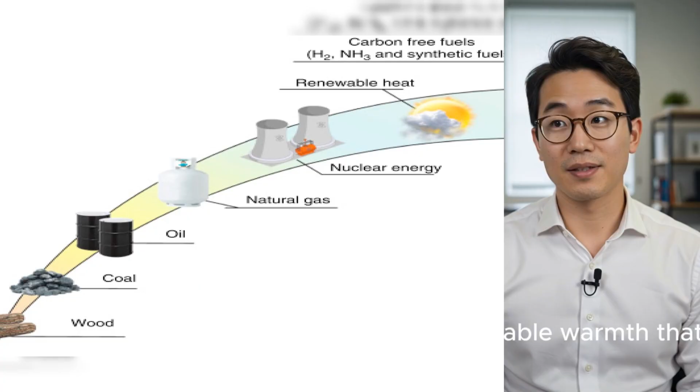The two elements responsible for this are so common that most people overlook them completely in daily life. One is sand, the same material found along riverbanks and building sites, or even right in a backyard. The other is coal, simple carbon pieces that have remained underground for millions of years, waiting for practical use.

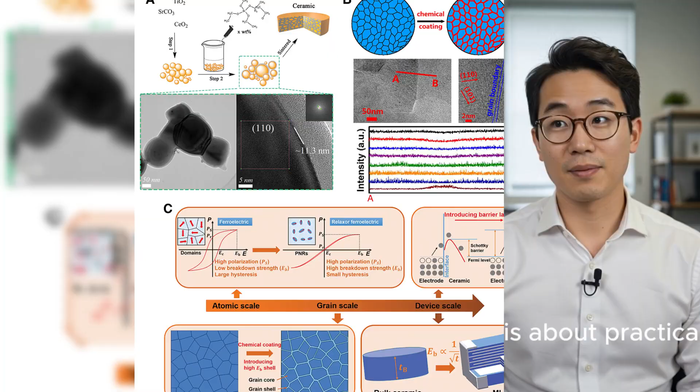When these two materials are combined correctly, they form something that large energy systems have long kept out of public understanding. This is not about extreme survival living or remote mountain setups. It is about practical application in normal homes, normal neighborhoods, and for ordinary families trying to manage rising living expenses.

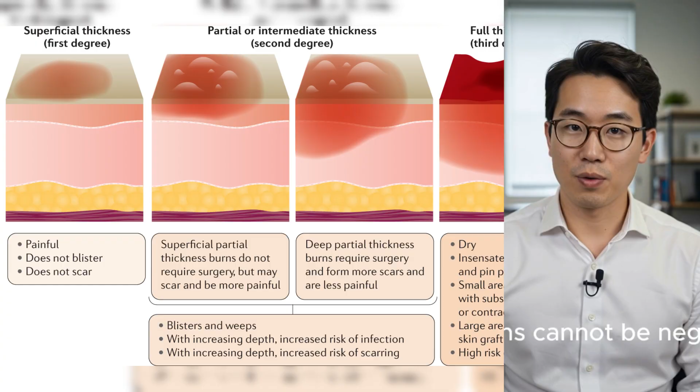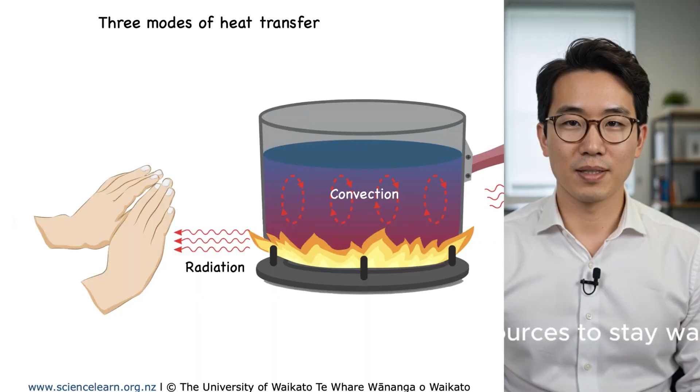Heat is one of the most fundamental human requirements. Cold conditions cannot be negotiated with. Either warmth exists, or it does not. Without it, every other difficulty in life becomes heavier. For most of history, people relied directly on local resources to stay warm. Wood, coal, dried plant material, and other naturally available fuels were used in simple systems.

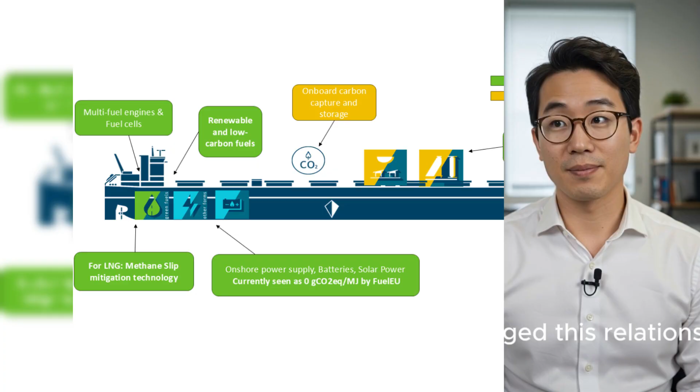Over time, industrial development changed this relationship. Pipeline networks, electrical grids, and centralized fuel systems gradually replaced personal energy independence. People became dependent on infrastructure they do not control. This means that in cold conditions, access to heat depends entirely on external providers and pricing systems outside individual choice.

That creates long-term financial pressure that many households simply accept as unavoidable. In reality, it is a structured system, and once the structure is understood, alternatives become visible. At the center of this idea is a thermal storage approach using dense material layers. Sand is one of the most effective substances for holding heat and releasing it gradually over time.

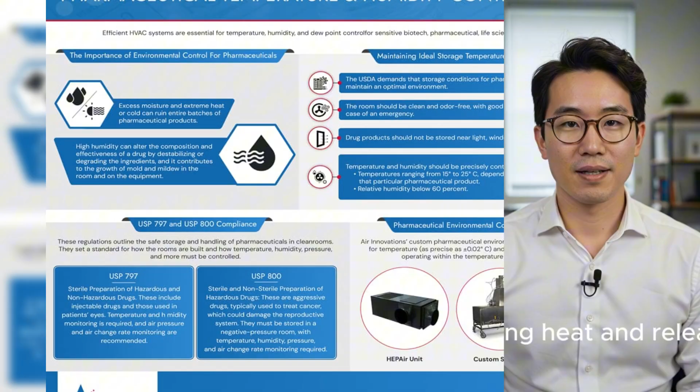This principle is not new. Earlier civilizations used thick, natural materials like stone and clay in building design to trap warmth during the day and release it later when temperatures dropped. Modern convenience replaced many of these older methods, and over time the knowledge became less common. However, the physical principle never changed.

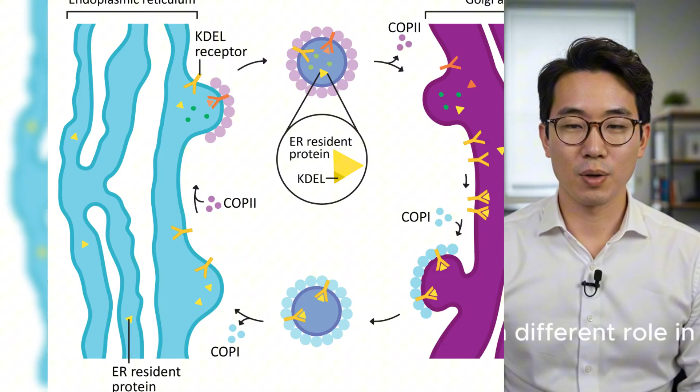Coal serves a different role in this system. When it is burned under proper conditions, it produces sustained high-level heat output relative to its size. The issue has rarely been the material itself, but rather inefficient usage.

When a controlled heat source is paired with a high-capacity heat-absorbing medium like sand, the behavior of heat changes. Instead of disappearing quickly into open air, energy is stored and released gradually. The result is a slower, more stable distribution of warmth that can align better with household needs.

The idea centers on a contained burning area surrounded by dense sand layers. As fuel is burned inside, heat spreads outward in all directions and is absorbed rather than lost immediately. Normally, open flame systems allow heat to rise and escape quickly into the surrounding space. That leads to rapid loss of energy, but within a storage-focused structure, heat is captured instead of wasted.

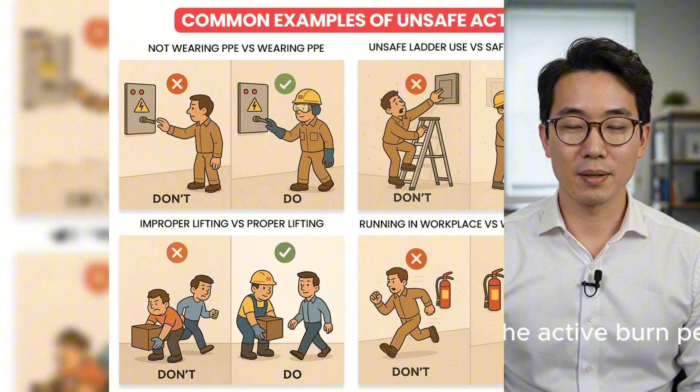The surrounding material holds it and releases it over time in a controlled way. This approach reduces dependence on continuous fuel consumption and shifts warmth into a stored form that lasts longer than the active burn period. This method changes the entire relationship between heat generation and heat loss.

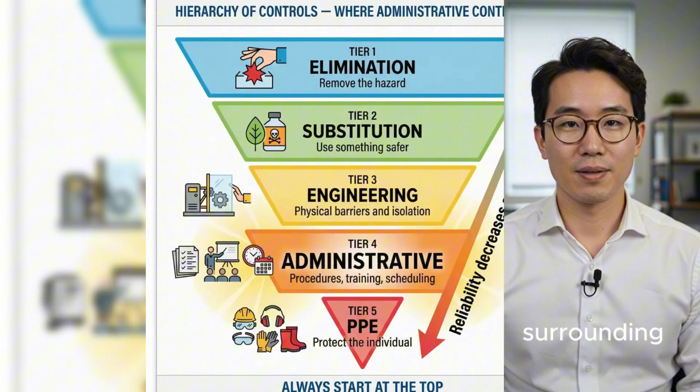When a combustion source is fully surrounded by sand, heat begins transferring into that surrounding material from the very first moment ignition occurs. The sand draws in thermal energy and retains it within its structure. What surprises many people is how long this retained heat can last. Sand is capable of holding thermal energy for extended periods even after the fire source is no longer active.

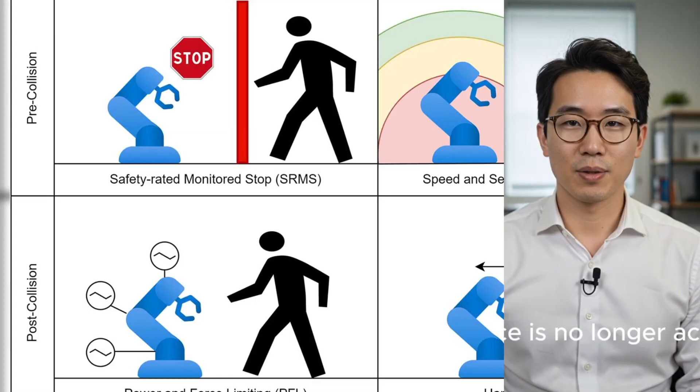This is not limited to a short cooling window. It can continue to emit usable warmth for 6 hours, 8 hours, and sometimes even 12 hours after the fuel has completely finished burning, depending on how thick and dense the thermal layer is.

That single property reshapes the cost equation entirely. Instead of maintaining continuous fuel consumption through the entire night, the system allows a single efficient burn to carry the heating load while the household is asleep. Coal plays a specific role within this structure, and it is often misunderstood.

In common discussion, coal is usually associated with large-scale industrial energy production. However, that is not the type of usage being described here.

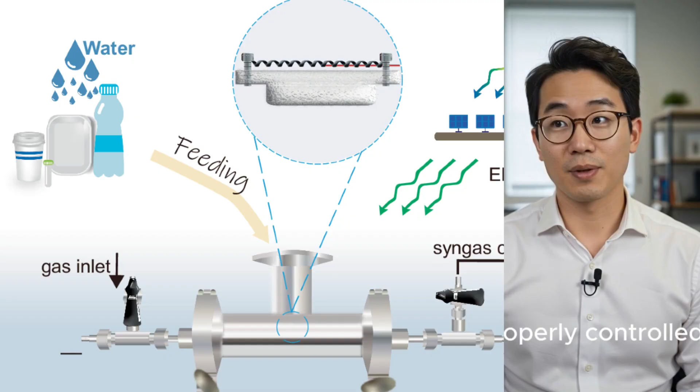Small-scale combustion, when properly controlled inside a contained environment, behaves differently compared to industrial burning systems. Three main factors determine performance: airflow, combustion temperature, and burn duration. When these variables are properly managed, the fuel produces steady, high-output heat while reducing wasted energy.

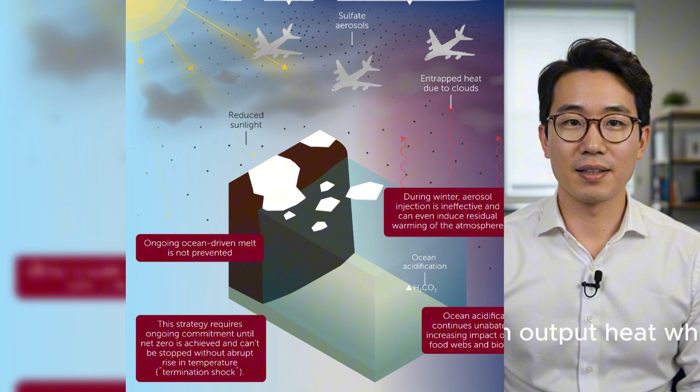Most inefficient results come from treating coal as if it behaves like wood, where it is simply ignited and left to burn without control. Coal requires a more structured approach.

Airflow is the most critical element. Oxygen supply must remain stable and controlled to maintain proper combustion conditions. If airflow is too strong, the burn becomes excessively fast, and fuel is consumed quickly, producing heat faster than the surrounding sand can absorb it effectively.

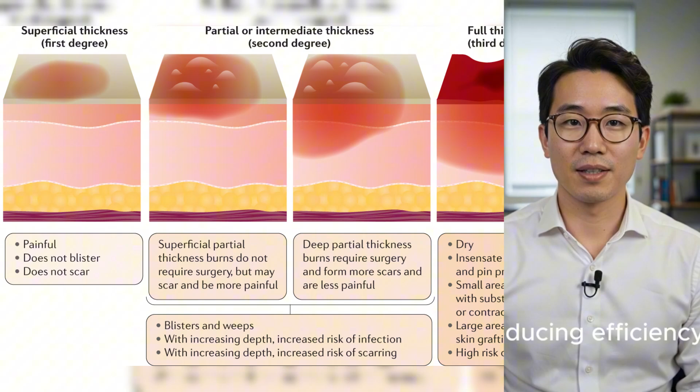If airflow is too weak, combustion becomes incomplete, reducing efficiency and creating more waste byproducts instead of usable heat.

The optimal condition is a balanced, steady airflow that maintains consistent combustion while allowing thermal storage materials time to absorb energy as it is released. In simple systems, this can be achieved through a regulated air intake at the base of the chamber structure.

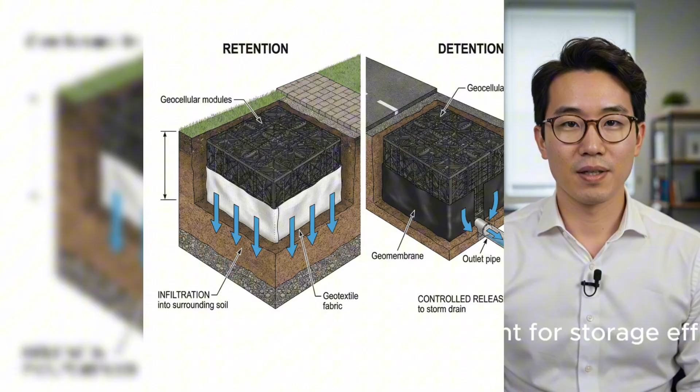Temperature control is equally important for storage efficiency. Sand begins to meaningfully retain heat only after reaching a certain thermal threshold. Below that level, it releases energy quickly and does not store it effectively. Above that threshold, its capacity to hold heat increases significantly.

Coal, when burned under correct airflow conditions, naturally reaches and sustains temperatures that fall within the effective storage range of sand. This compatibility is what makes the combination function efficiently.

The physical construction of the system requires only a limited set of materials. An outer shell structure can be formed using clay, brick, or reused metal, and its purpose is to hold the sand in position around the combustion zone.

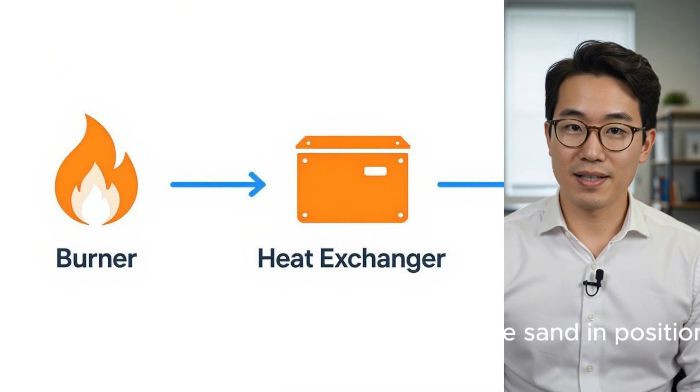The combustion chamber itself must withstand continuous high temperatures without structural failure. Fire brick is commonly used because it maintains durability under heat stress and is widely available. In many cases, used fire brick can be recovered from demolition material sources at very low cost.

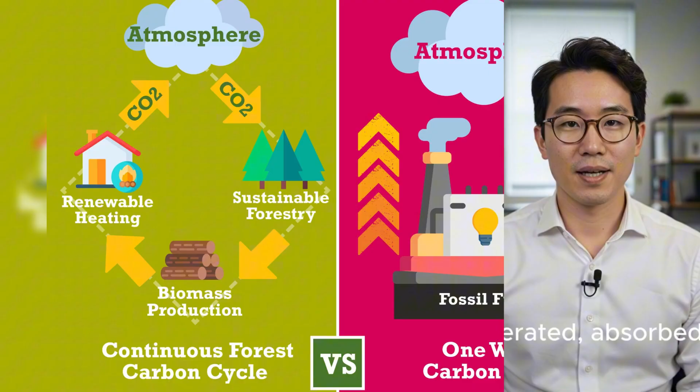Once assembled, the system appears simple externally but functions with a layered internal process. Heat is generated, absorbed into sand, and then gradually released into the surrounding space over time. The result is a heating cycle, where energy continues benefiting the environment long after the active burn period has ended.

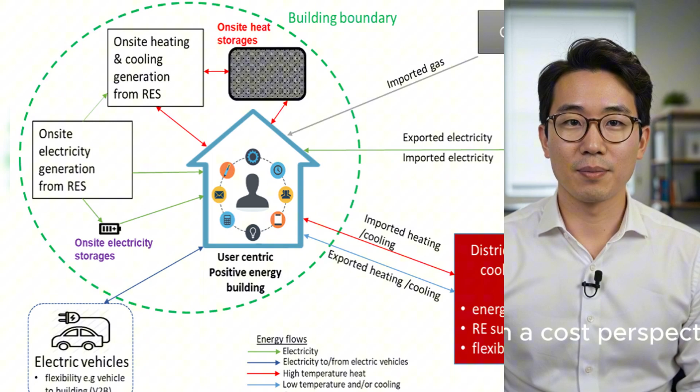From a cost perspective, this significantly reduces fuel consumption compared to systems that require constant energy input, such as electric heating or gas-based systems over the same duration.

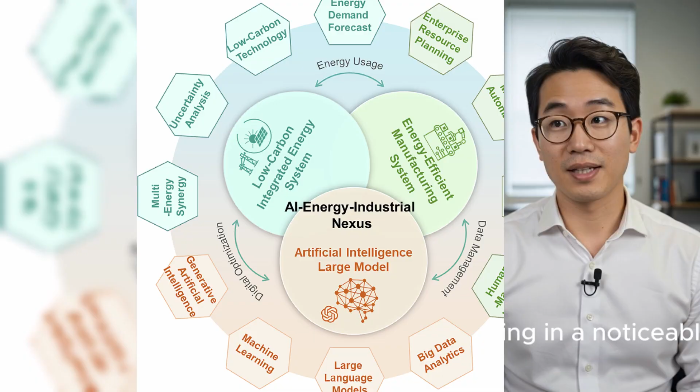Over an entire cold season, the difference in energy usage becomes substantial enough to impact household budgeting in a noticeable way. This reality is especially relevant for households under financial pressure, where heating costs represent a major recurring expense.

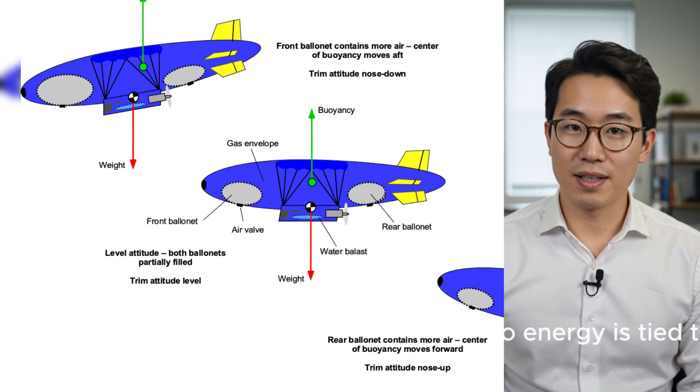At a broader level, access to energy is tied to large infrastructure systems that require ongoing consumption. These systems are operated by large organizations whose financial structure depends on repeated usage over time.

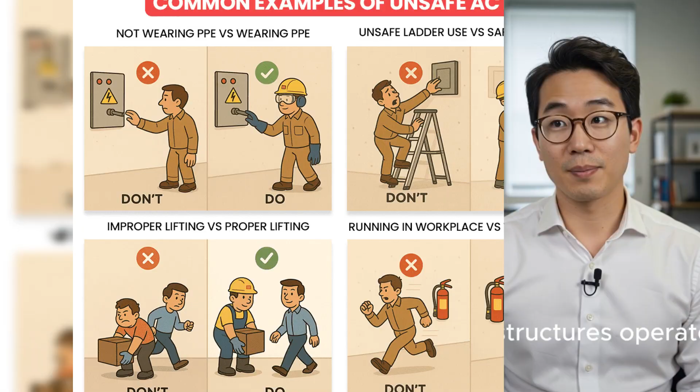Within that framework, independent low-cost alternatives are not commonly emphasized in public communication. This is not presented as an external claim, but as a reflection of how incentive structures operate in large-scale energy distribution. Understanding this dynamic helps explain why certain efficiency-based approaches remain less widely known.

Returning to practical application, the system is not intended as an immediate replacement for existing heating setups. It can be introduced gradually as part of a broader approach to reducing overall fuel dependency, rather than requiring a complete structural change in a single step.

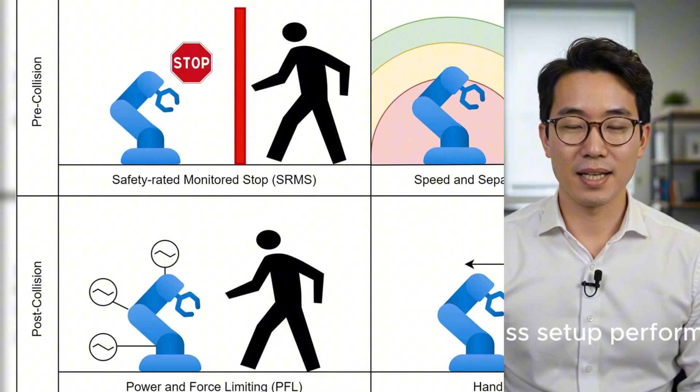In most homes, people discover that a thermal mass setup performs best when it is focused on the primary living area. This is the space where families spend the majority of cold hours during the day and night.

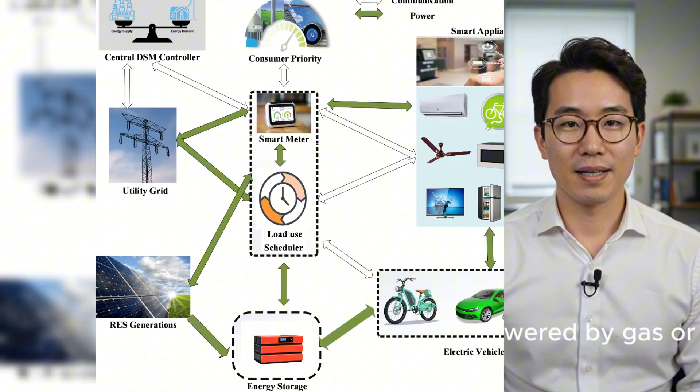Conventional heating systems, whether powered by gas or electricity, can still remain in place. They function as backup support for other rooms or for periods when the thermal unit is not in use. This combined method reduces total energy demand without forcing an immediate full replacement of existing systems. The approach is gradual, allowing testing and adjustment before any deeper commitment is made.

The sand required for construction is widely available. River sand, construction-grade sand, and even landscaping sand from hardware sources are all usable materials. What matters most is that the sand is dry and dense.

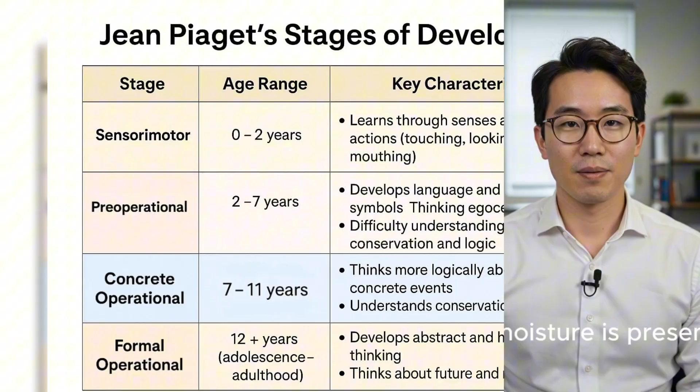If moisture is present, performance drops significantly. Water absorbs heat quickly and then releases it in an unstable way, which interferes with controlled heat retention. Dry sand provides more stable storage and distributes heat more evenly over time.

When collecting sand from natural environments, it must be fully dried before use. Spreading it out and allowing it to lose all moisture improves efficiency in a measurable way.

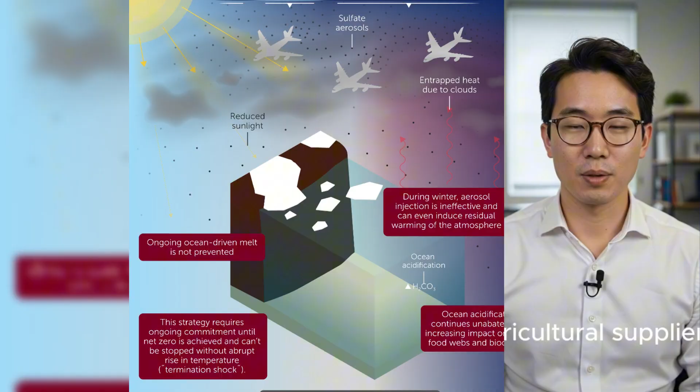Coal sourcing is also more accessible than many expect. Small quantities for home use can be obtained through agricultural suppliers, heating material vendors, and online distributors that ship directly to households. In rural areas, local suppliers often provide lower-cost access due to long-standing distribution networks serving farming communities.

Only small amounts are required for a single room system. When the design is efficient, fuel consumption per unit of heat output is lower than most initial expectations. Performance improves further once the sand layer reaches full thermal saturation after repeated use cycles.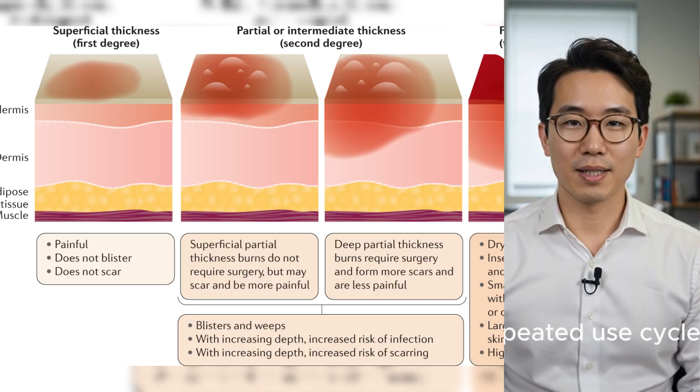Safety is a critical part of the system and cannot be ignored. Any process involving combustion carries inherent risks that must be properly managed.

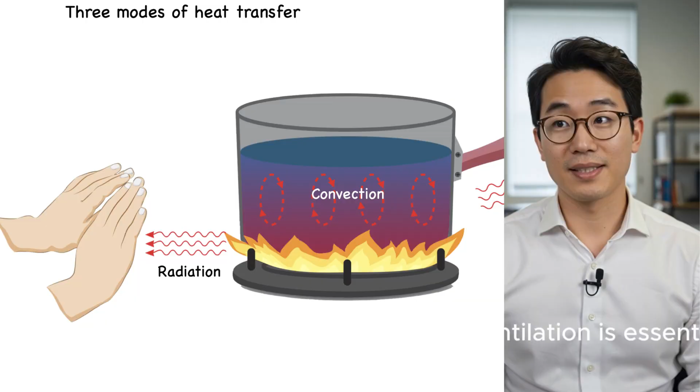Ventilation is essential. A system that burns fuel indoors must allow continuous airflow to remove combustion gases from the living space. A properly installed flue or chimney directing gases outside is a basic requirement for safe operation in any enclosed environment, whether the system is homemade or commercially built.

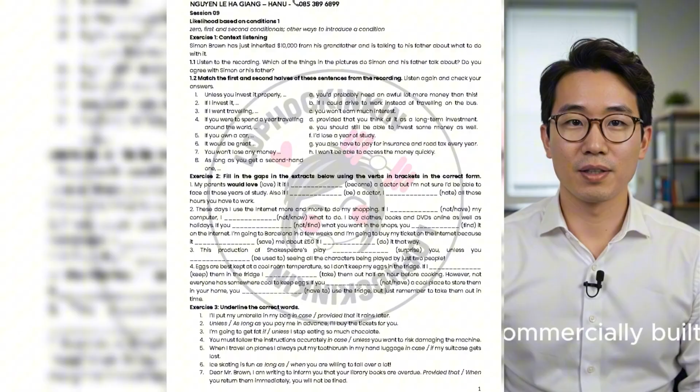If proper venting is not possible, the system can be adapted for outdoor or semi-outdoor use. In this configuration, heat is transferred through a barrier such as a wall into the living space. This option is often preferred because it simplifies safety management.

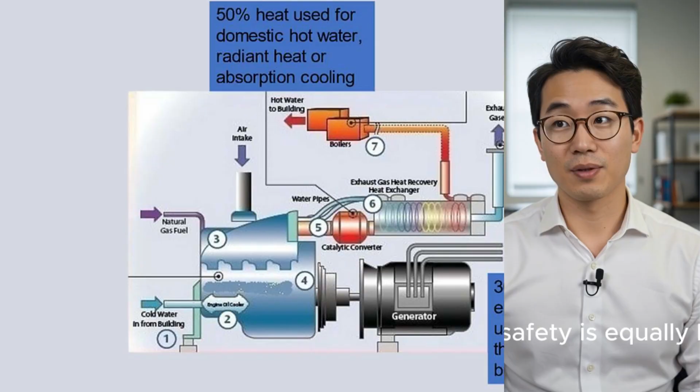Structural safety is equally important. Materials used in the combustion zone must withstand prolonged high temperatures without failure. Fire brick combined with high-temperature mortar is the standard choice due to its durability under extreme heat conditions.

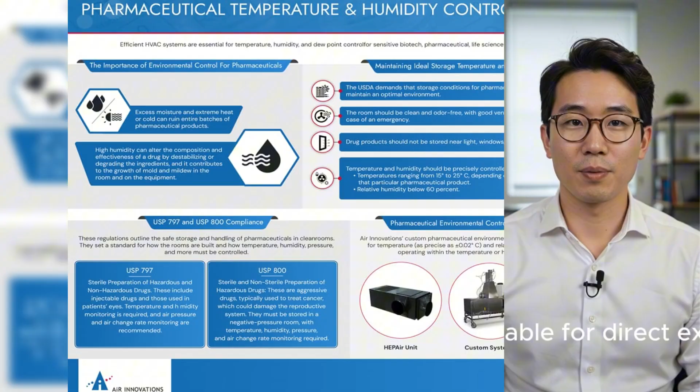Standard household bricks and regular mortar are not suitable for direct exposure to combustion heat, although they may be used in outer structural layers that remain distant from the core heat zone. Proper construction at the beginning prevents system failure later and ensures long-term stability.

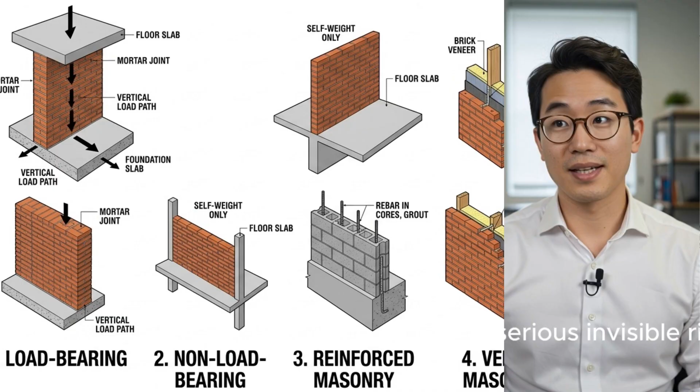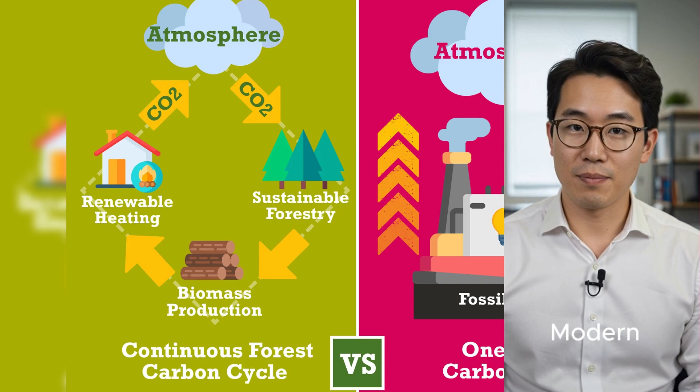Carbon monoxide represents the most serious invisible risk in any combustion-based system. It cannot be detected without proper equipment. A carbon monoxide detector placed in the operating space provides a low-cost and effective safety layer. Modern detectors are affordable and reliable, offering continuous monitoring that supports safe operation without constant uncertainty.

With these safety measures in place, the system becomes a low-cost heating method that relies on widely available materials and produces sustained warmth comparable to traditional systems that require far higher monthly expense. Over time, this creates a significant difference in household energy spending, especially during long cold seasons.

When energy prices rise during peak winter demand periods, households using this approach are less exposed to sudden cost increases. They operate outside the direct pressure of fluctuating utility pricing. This shift creates financial stability by reducing dependence on external energy systems that adjust prices seasonally and under high demand conditions.

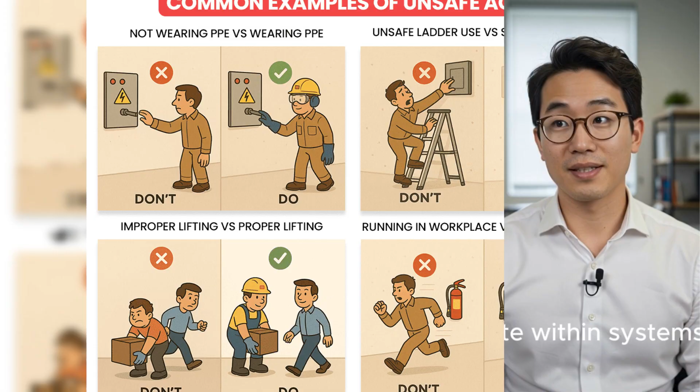At a broader level, modern energy infrastructure depends on continuous consumption. Large providers operate within systems that require ongoing usage to maintain revenue flow. Within that structure, low consumption or independent alternatives are not typically highlighted in mainstream communication.

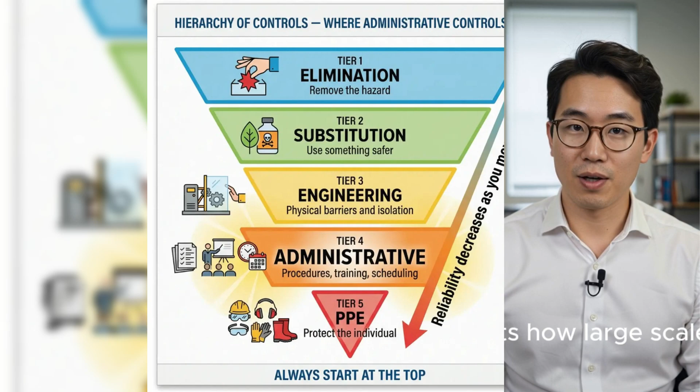This reflects how large-scale systems prioritize sustained demand. Understanding this helps explain why certain efficient household methods remain less widely discussed.

However, this is not about replacing entire energy infrastructure immediately. It is about gradual reduction of dependency and increasing household control over basic heating needs. The process is incremental, allowing households to adjust step by step rather than making sudden structural changes.

What emerges is a practical shift in how heating demand is managed. It is not based on complexity or advanced technology, but on material behavior and controlled energy storage. The outcome is a system that reduces ongoing costs, uses accessible materials, and provides a level of independence that many households have not considered possible in modern conditions.

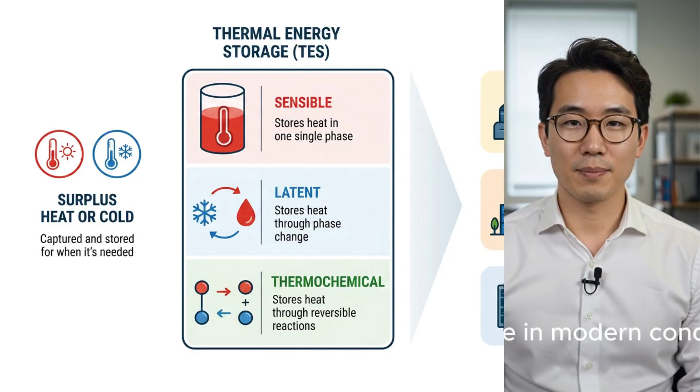This is the point where awareness turns into action, not through large-scale change, but through simple application of what is already available. Take this information, evaluate it for your own situation, and consider how even partial implementation could reduce dependence on conventional heating systems. That decision begins with understanding, and it continues with practical steps taken at the household level.